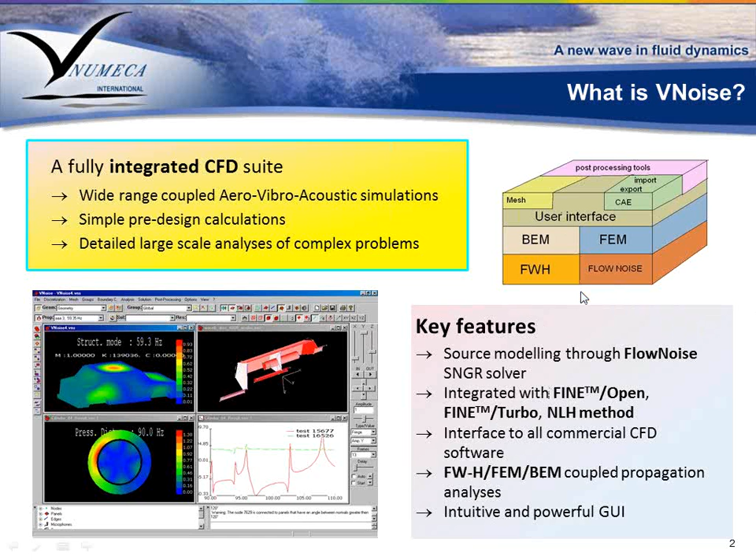So these are the main modules that are present in VNoise, and the focus of this presentation will be to show some practical applications of the software. For this reason, the presentation will be split in two parts. In the first part, you will have some examples on how to apply VNoise to turbomachinery, in particular to simulate tonal noise. Two cases are considered: an air conditioning fan and a rotating propeller. In the second part of the presentation, instead, I will show you how to use VNoise to model broadband noise generated by a ducted valve. I want to underline that this webinar is focused on practical applications.

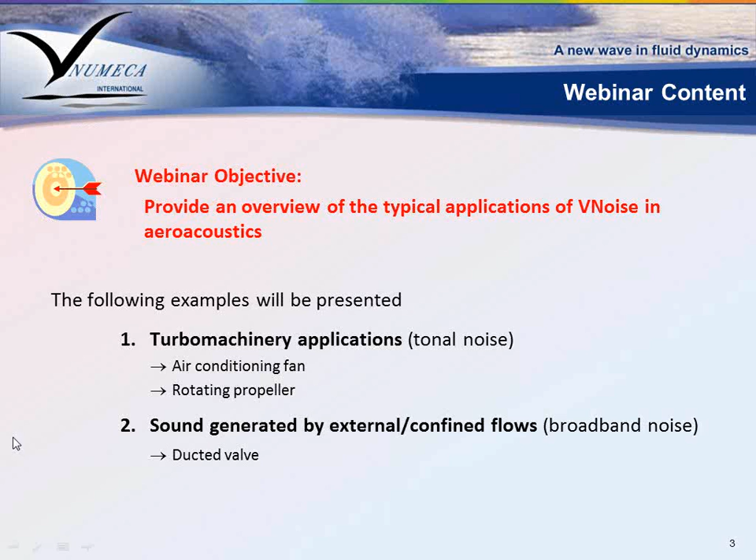For a more detailed description at a theoretical level of the modules implemented in VNoise, I remind you that this information is included in the previous webinar that was held by Numeca some months ago. Okay, so we can start with the first part, turbomachinery applications. As you may know, the main noise generated by turbomachinery is tonal noise generated by unsteady flows, so this is a deterministic noise type.

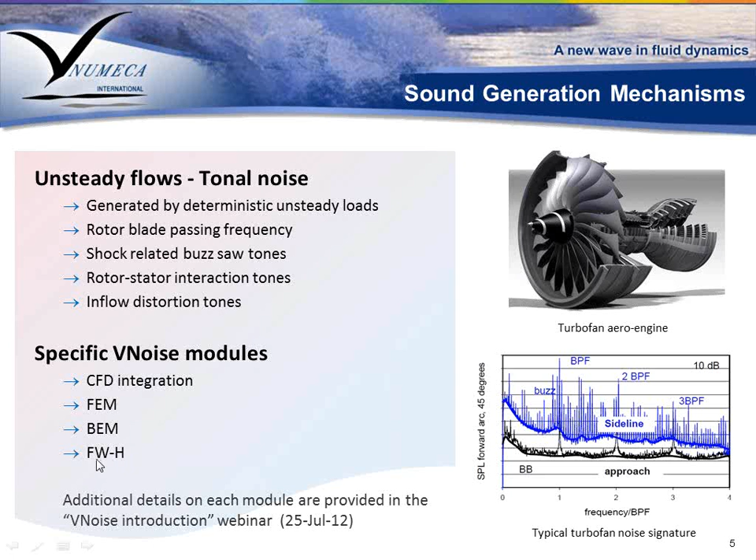So this example of application is focused on the computation of the noise at the BPF and at the harmonics, so tonal noise. For this purpose, in VNoise we can use several modules, so the CFD integration module. We can apply a finite element method or a boundary element method to compute the sound propagation. In the case of the rotating propeller, I will show you also an example on how to apply the Ffowcs Williams-Hawkings method.

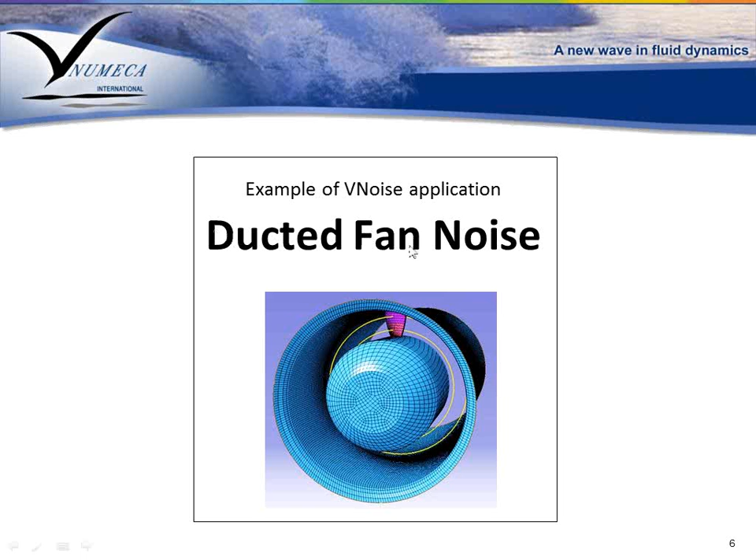Okay, so the first case that I want to share with you and present to you is the simulation of a ducted fan. In this case, we have a fan that is ducted here, and the goal of the simulation is to compute the noise generated by the fan and radiated outside from the intake.

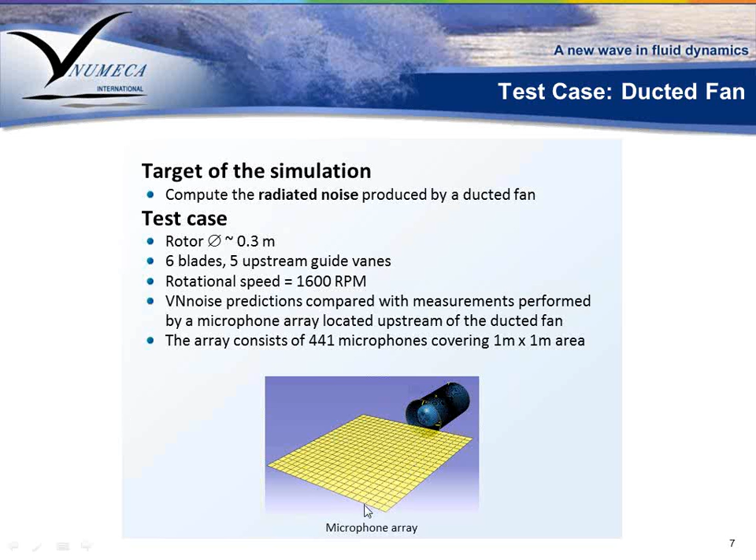So the rotor is very small, 0.3 meters of diameter. We have 6 blades, 5 upstream guide vanes, and the simulation results are sampled over this microphone array that is located in front of the intake in which the fan is enclosed, and the results are then compared to measurements performed by placing microphones here.

So the computational approach will be first to compute the acoustic source, so to characterize the acoustic source. We know that the source in which we are interested is tonal, and for this reason we can perform a CFD simulation to extract the acoustic pressure over the blades, and for this reason we have adopted the NLH method, so the nonlinear harmonic method implemented in FINE/Turbo.

After this, once the source is computed, we then have to work with VNoise to compute the noise propagation. And in this case, the mean flow in the duct is low speed because this is an air conditioning fan, and it is sufficiently uniform to allow the application of a boundary element method. So for this reason, we have to generate a BEM acoustic mesh, and then the mesh has to be generated and imported in VNoise.

Then once we have the acoustic mesh imported in VNoise, we have to import the NLH solution, and the solution will be projected onto the acoustic mesh, and this projection will be used as a boundary condition to model the source in VNoise. Then we perform the sound propagation in the duct and the radiation outside of the duct towards the free field by using a multi-domain boundary element method analysis.

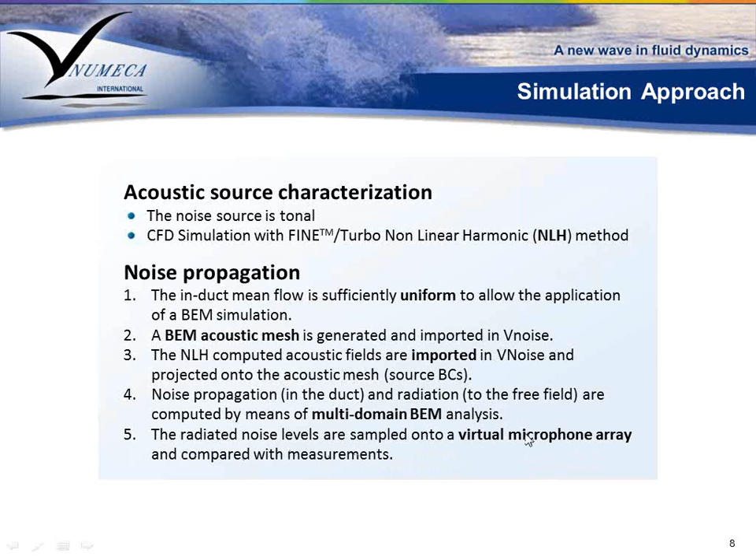And then the last step is to post-process the acoustic results and compare the results with the measurements. So this is the sequence of our computation. We will now go through each of these steps, showing some images and some of the results obtained.

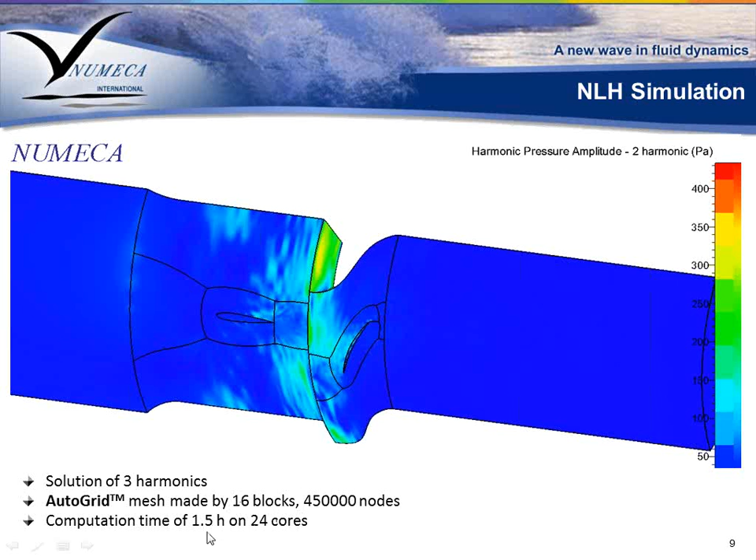The mesh was realized in AutoGrid, and you can see here the size of the mesh used, and the computational time was very fast, considering that in 1 hour and a half on 24 cores we got a solution up to 3 harmonics. So this method is very powerful to compute the tonal acoustic source, that can be then input in VNoise.

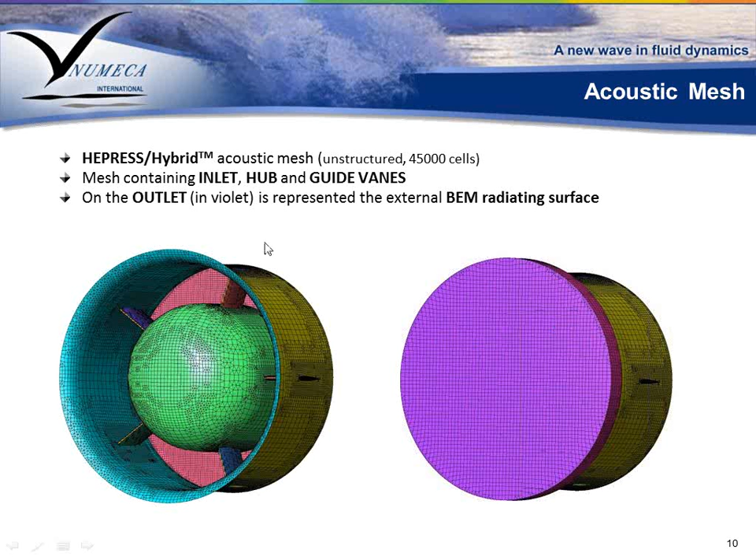So we can then perform the step necessary to import the NLH solution in VNoise. As you can see here, once the acoustic mesh is imported in VNoise, VNoise also imports the NLH solution. That means the NLH mesh plus the NLH solution. The meshes are overlapped, as you can see here, and on this plane, the inlet surface plane, the solution of NLH is projected directly onto the acoustic mesh.

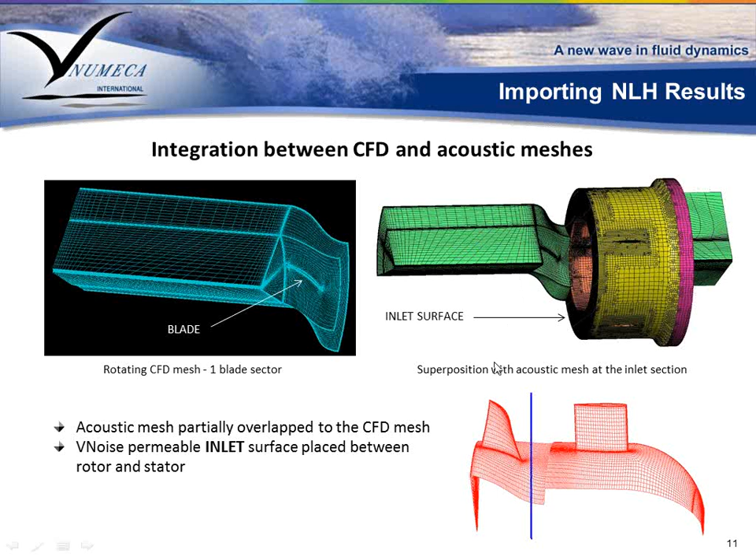In this case, we are using the NLH solution, but this process can be applied to any solution that you may have obtained with your own CFD code. The result of this importing is represented here. So on the inlet surface, you see the solution, the acoustic field. This is a typical acoustic field at a given frequency, imported.

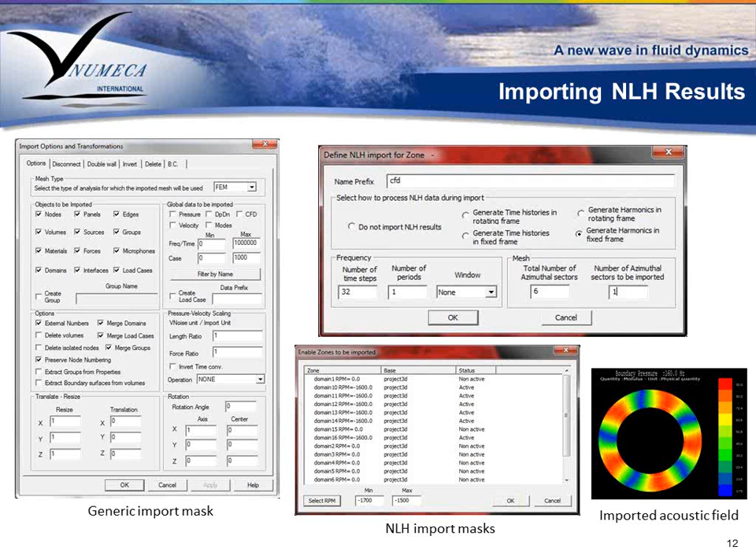For this reason, VNoise offers this import mask, in which it is possible to define whether I want to import the solution on a rotating frame or on a fixed frame, and if I need to generate time histories from frequency data, or the opposite. And it is possible, if I want to model, for example, a fan, like in this case, to import just one blade. So the solution is computed over one blade. VNoise will automatically rotate the solution and create the full 360-degree acoustic solution on all the rotor.

So once we have imported the solution, we have now to set up the VNoise model for the computation of propagation. In this case, as I said before, we are using a BEM model. You can see here a sketch of a section of the duct. We have imported the NLH solution on the inlet, and then on these solid surfaces, instead, we will define a boundary condition that tells the BEM solver that these surfaces are rigid, so the sound is reflected by these surfaces. And then, as I showed before, we have also to create a permeable mesh over the outlet to close the computational domain, and it is represented here.

So we have a radiation surface, this one; practically it is this mesh that will close the duct. And also in between the two meshes, the external mesh and the internal mesh, we need to define a condition that ensures the continuity of field variables. So here we define an interface boundary condition that allows the acoustic waves, as you can see here, to cross this surface.

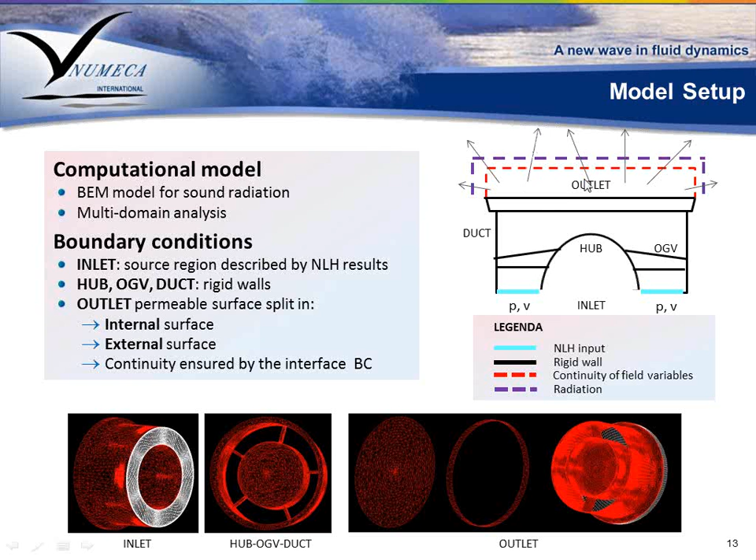Another important aspect to be considered is that when you apply the BEM method, you work with panels, so with a surface mesh, and it is fundamental that the normals of each panel are pointing inside the computational domain. So as you can see here, VNoise allows you to very easily verify and to exchange, if necessary, the direction of the normals. Here are represented the normals of the duct. Here are represented the normals of the cap closing the computational domain.

As said before, we need to have a radiation mesh. The radiation mesh is the green one, and it is a mesh coincident with this red one, so sharing the same nodes but with different panels. And the normals of these panels are pointing clearly outside, towards the computational domain that for this mesh is the external space.

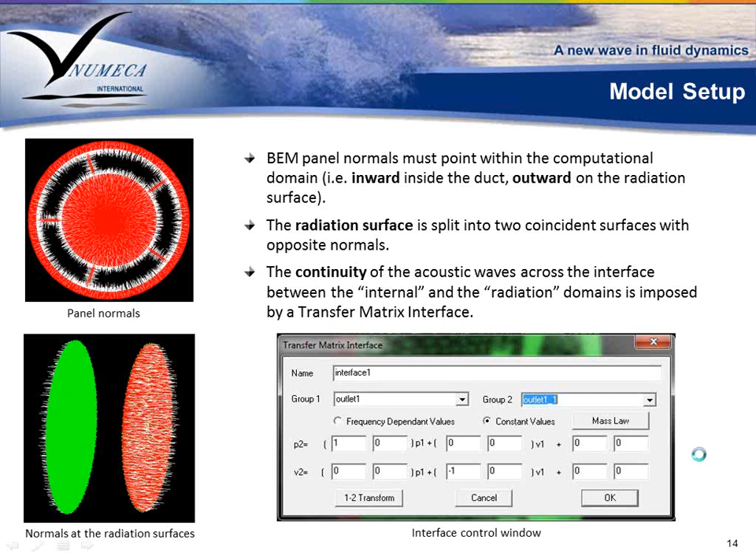In VNoise there are masks like this that allow you to define the interface boundary condition, for example, from a closed computational domain to a radiation computational domain. Here you can link the acoustic pressure and the acoustic velocity on this green mesh to the acoustic pressure and acoustic velocity of the inner part. So by defining, for example, this coefficient, you can allow the propagation of waves across this surface. So this is a powerful mask that allows you to create the model rapidly in VNoise.

Once you have set up your model, you can start your analysis, and you will obtain the radiated acoustic field over the microphones defined in VNoise. The microphones are located here outside, and typically in VNoise you can visualize the results in terms of sound pressure level, so in decibels. This is the map over this microphone of the sound pressure level at 800 Hz. You can see the comparison with the experimental results obtained. And here on the right side you can see an animation that VNoise can provide. So you can visualize the acoustic waves at a given frequency radiating from the intake.

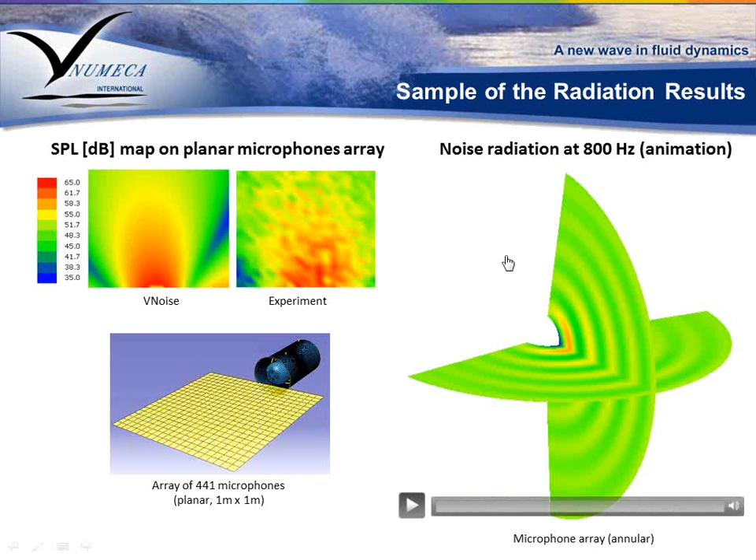It depends where you put your microphones. You can also have values expressed from Pascal to decibels, with a narrow band spectrum up to the 1/3 octave band spectrum. You can obtain also computation of the radiated power or averaged values over a given surface, like the average impedance or the average intensity and so on. So this is a first application showing how to model a fan for ventilating systems.

The second application that I want to present is the simulation of noise generated by a rotor of a propeller. Here we are considering a contra-rotating open rotor, but we will apply the simulation of VNoise just to compute the noise generated and radiated by one of the two rotors, so by this one.

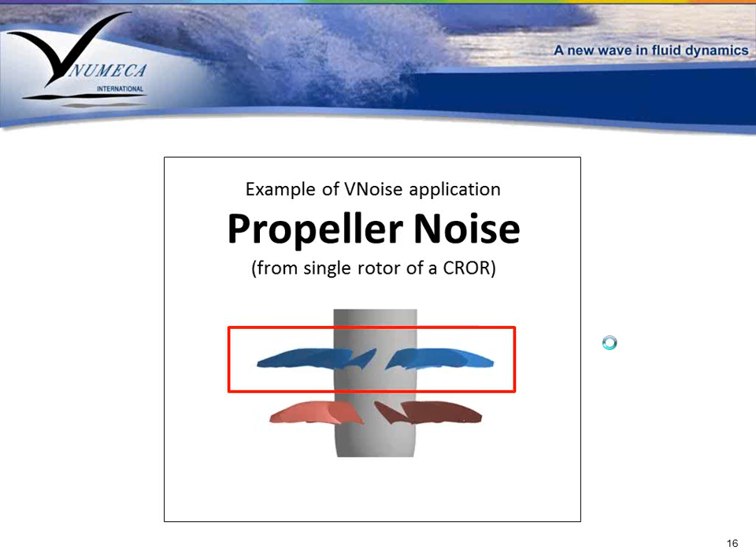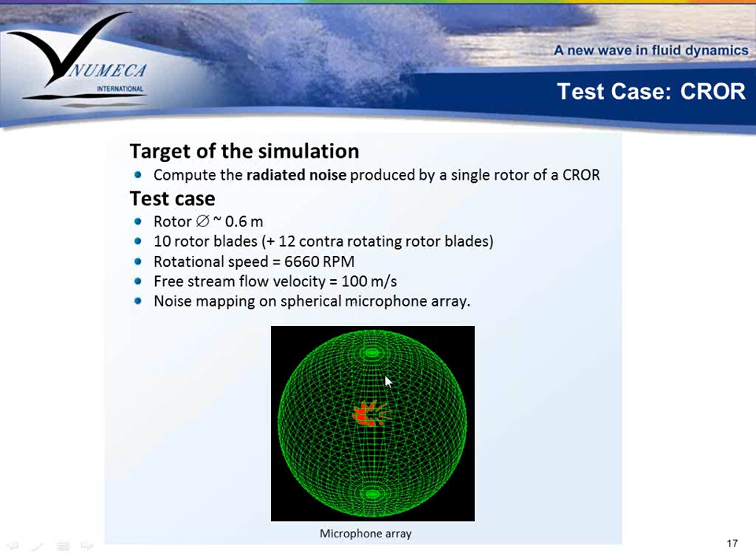The case is this one, shown here. We have a rotor of 0.6 meters of diameter, and that is this one. We have 10 blades on the rotor, and 12 blades on the contra-rotating rotor. This is the rotational speed, and the goal of this simulation is to map the noise radiated over this spherical microphone array.

The approach will be to perform again an NLH simulation, because the main noise that we want to study here is tonal. And as said before, to simplify the demonstration of this application, I have just considered one of the two rotors. So we are studying the noise coming from one of the two rotors.

Then we start from the NLH simulation. In NLH we model just one blade passage, so in VNoise we have to reconstruct the 10 rotor blades, and I will show you how to do that later. After this step, we can import the NLH solution in VNoise directly and project the results directly onto the surface mesh.

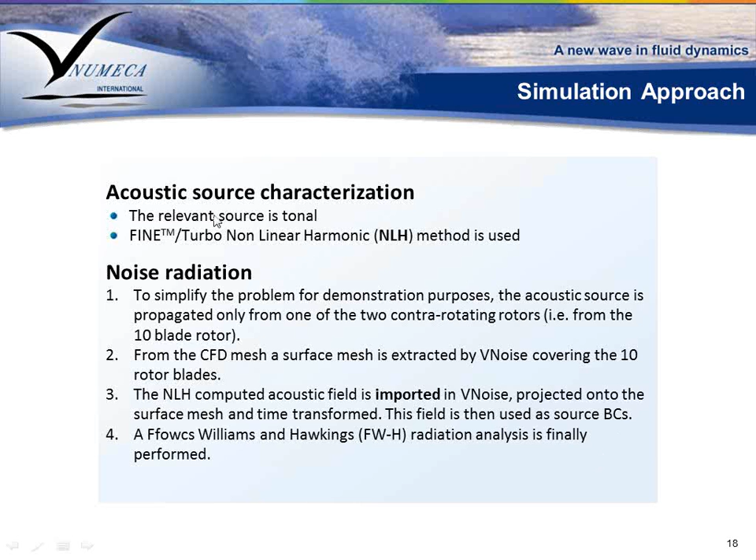NLH, as you know, provides harmonics, so the data obtained are expressed in the frequency domain, but VNoise can transform this data into the time domain to reconstruct the time history. This is necessary because we are then applying the Ffowcs Williams-Hawkings method, which needs a time history as input. So this is the sequence of steps that we are adopting.

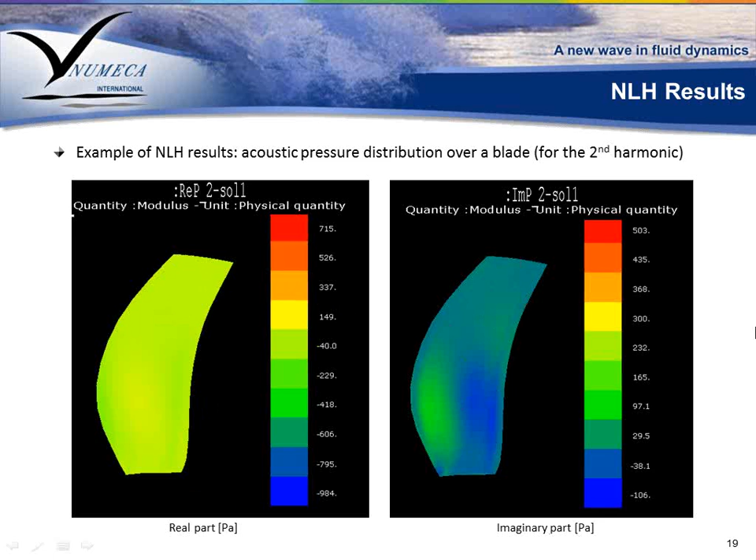Here we can see a sample of the results provided by NLH. On a given blade, at a given harmonic, in this case the second harmonic, we have the acoustic pressure. You can see here the real part and the imaginary part of the distribution. These results are then used by VNoise.

Here you can see that the computational mesh in NLH models just one blade-to-blade passage. For this reason, in VNoise you can import this volume mesh and extract directly the skin of the free surfaces of this mesh, creating a surface mesh made of panels. Then the mesh for each blade can be rotated easily in order to create at the end a 10-blade surface, represented here.

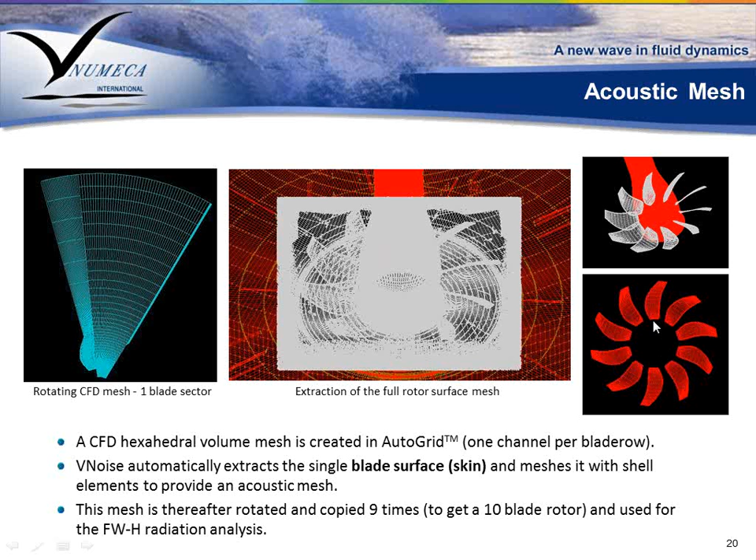So in this pre-processing made by VNoise, you can extract from a CFD mesh your acoustic mesh, which in this case needs to be a surface mesh that can be used for the Ffowcs Williams-Hawkings propagation analysis.

Here again is the import mask that, once you have the acoustic mesh, allows you to take the CFD solution as input and generate time histories. In this case we are generating time histories in a rotating frame, because we want the time history of the fluctuating variables at each node of this mesh, and the frame here is rotating at a given speed.

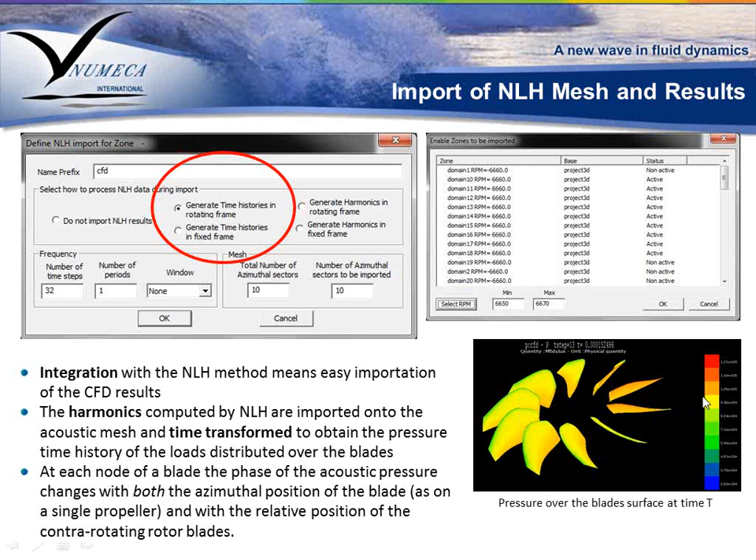So we can import the solution, and you can see here at a given time step an example of the acoustic pressure distributed over the blades. After that, it is possible to launch the Ffowcs Williams-Hawkings radiation analysis. This analysis can be controlled by this mask.

In this mask you can see, for example, the rotational speed indicated here. You can define the velocity and the rotational axis, so you can define all the kinematics of your rotor here. Then you have a mask where you can include the fluid parameters, typically the sound speed and the density. Then you can select the different types of formulations. In this case, we are using the Ffowcs Williams-Hawkings formulation 1A.

Then you also define the maximum frequency for which you want to reconstruct the results, because Ffowcs Williams-Hawkings provides a time history, and this time history is Fourier transformed to get the data you need at the different frequencies. Typically, this analysis is made for a period at least as long as one rotation of the rotor.

Another important parameter is this one, which represents the unsteady load period, the duration of the CFD simulation. This duration can be smaller than the rotational period of the rotor, as in this case. In particular, it is 24 times smaller. This is due to the fact that on a blade of one rotor during a rotation, the acoustic loads change 24 times due to the interference with the second, contra-rotating rotor.

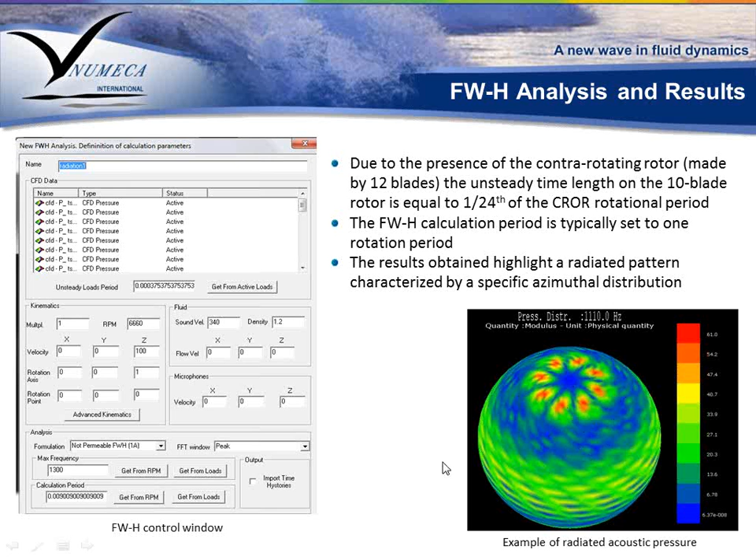And now I will enter the second part of this presentation, in which from the computation of tonal noise we switch to computation of broadband noise. This is typical noise that is generated by turbulence on surfaces, like over wings or wherever you have a solid body embedded in a flow. So the sound here is generated by unsteady velocities due to the turbulence, and typically this happens in a boundary layer or in a turbulent wake.

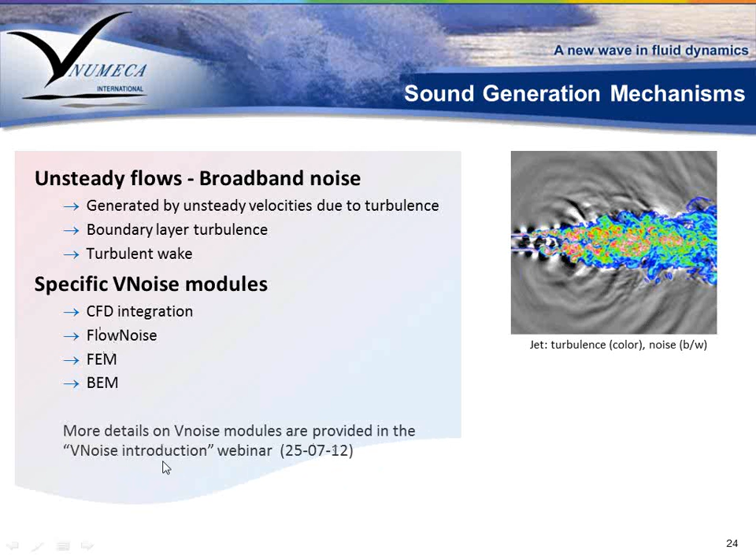What you can see here is that the main modules we are using in VNoise for this analysis are the CFD integration, the FlowNoise modules as well, and for computational propagation, again, finite element or boundary element methods. As said before, all the details on these modules can be found in the VNoise introduction webinar made in July.

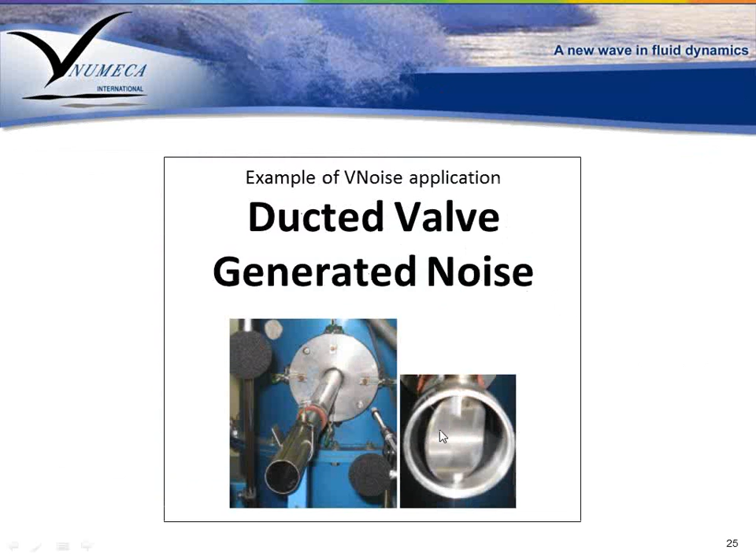So this case is a ducted valve that you can see here. There is a duct with a valve enclosed in the duct. The valve is open at 45 degrees. So there is a generation of turbulence here and the noise. Then the sound is propagated along the duct, and it's radiated outside. When the sound goes outside, it is measured by these microphones. So the goal of the simulation is to compare the results calculated at these microphones with the measurements made.

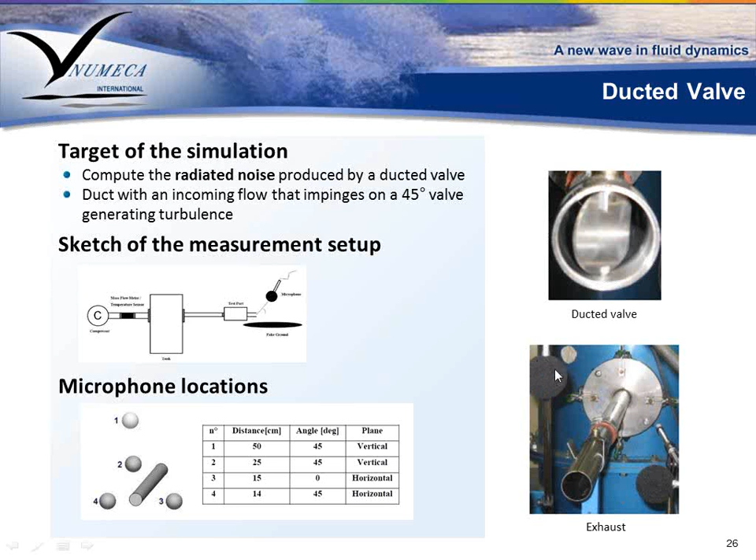The steps of the simulation are, first of all, as the sound here is typically broadband, to perform a RANS simulation that provides time averaged information on the flow field. Then the RANS solution is imported in VNoise, and on top of this solution the stochastic noise generation and radiation model embedded in VNoise is applied. That is a powerful algorithm that allows you to reconstruct the turbulence from steady-state results. This avoids performing complex and time-expensive LES simulations, and provides a stochastic approach to the reconstruction of the noise from turbulence.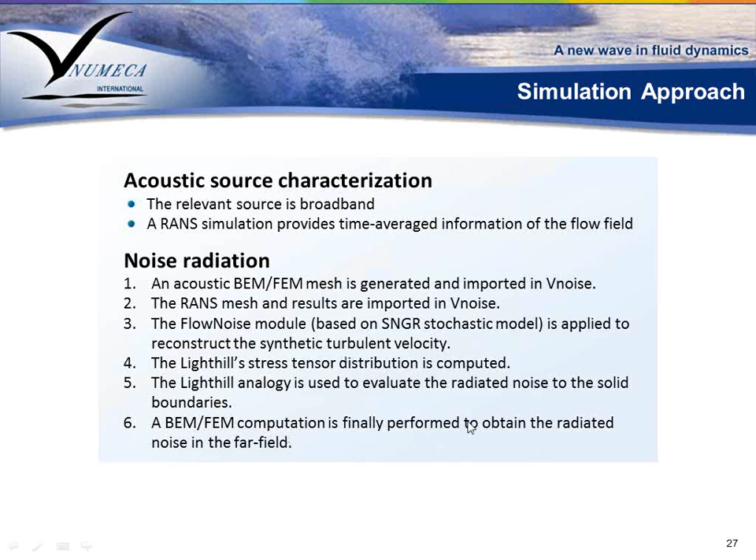After that, once you have the turbulent velocities reconstructed in each CFD cell, VNoise calculates the Lighthill stress tensor distribution on each cell, and then through the Lighthill analogy, the sound is propagated in the free field, in particular over the surfaces that are represented in this case by the duct and by the valve. It is possible then to obtain the incident acoustic field on these surfaces. After that, a BEM or FEM computation is performed to compute the reflected acoustic field. The sum of the incident and the reflected acoustic field provides the full acoustic field. So now we will see all these steps one by one.

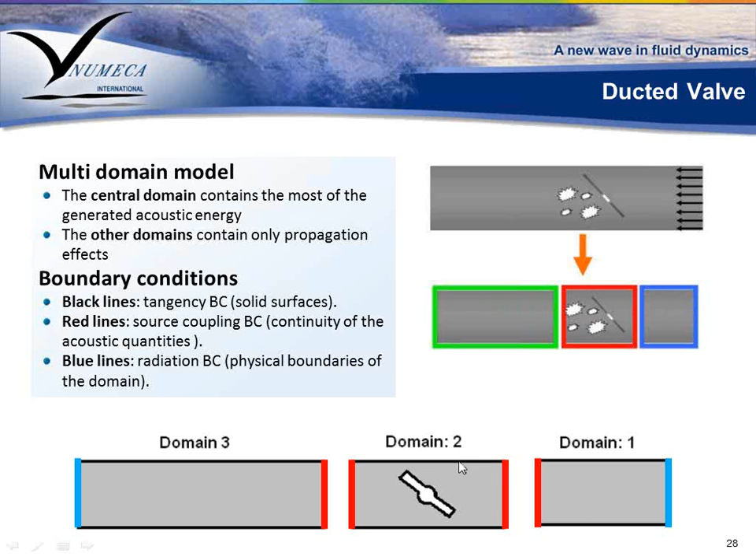So first of all, this is our duct with the valve. The flow is coming from the right to the left side. There is turbulence generated around the valve, so we can first of all subdivide the computational domain in 3 closed domains. 2 are used for the propagation, domain 1 and 3, and domain 2 instead is used for the computation of the source.

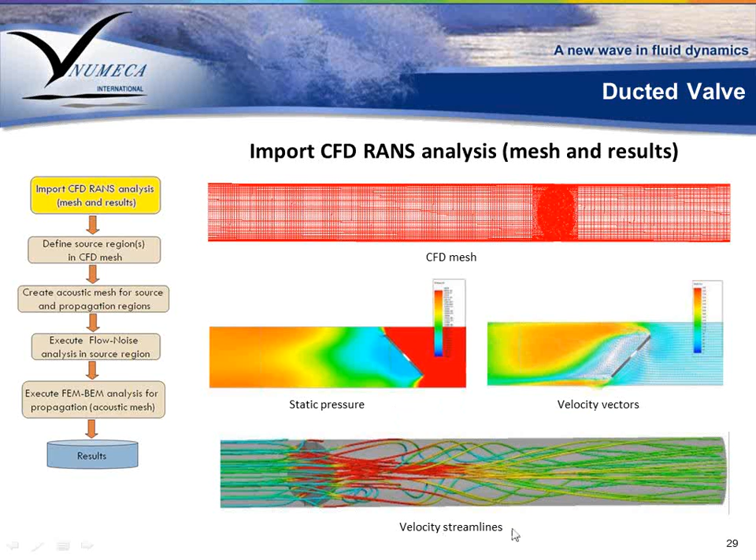So the first step is to perform a CFD analysis. You have here a CFD mesh, and the RANS analysis provides static pressure values, velocity vectors, velocity streamlines, but in particular turbulent kinetic energy and the dissipation. These parameters are used then to identify the acoustic sources, where they are located and what is their intensity. So based on the turbulent kinetic energy and on the dissipation level, the sound sources are reconstructed.

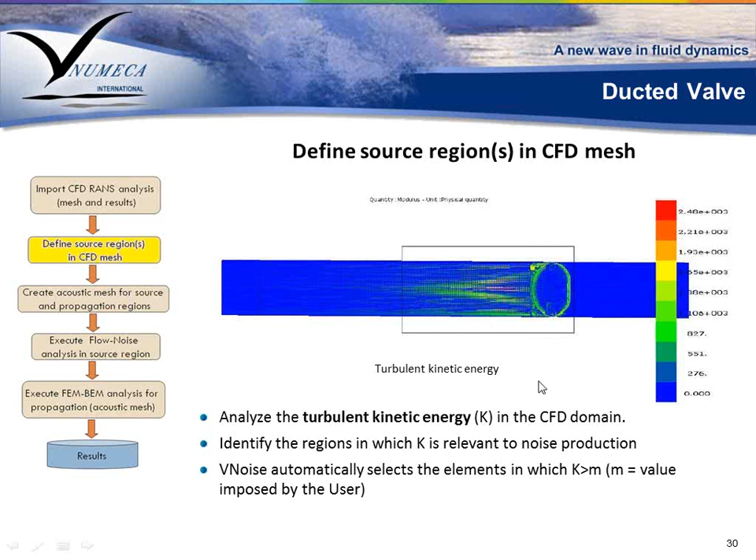VNoise allows you to automatically extract the source, so from all the CFD domain to isolate a subdomain containing the relevant turbulent kinetic energy. So the user has just to define the minimum value of the turbulence, and VNoise will extract all the solid elements containing a turbulent kinetic energy higher than that value.

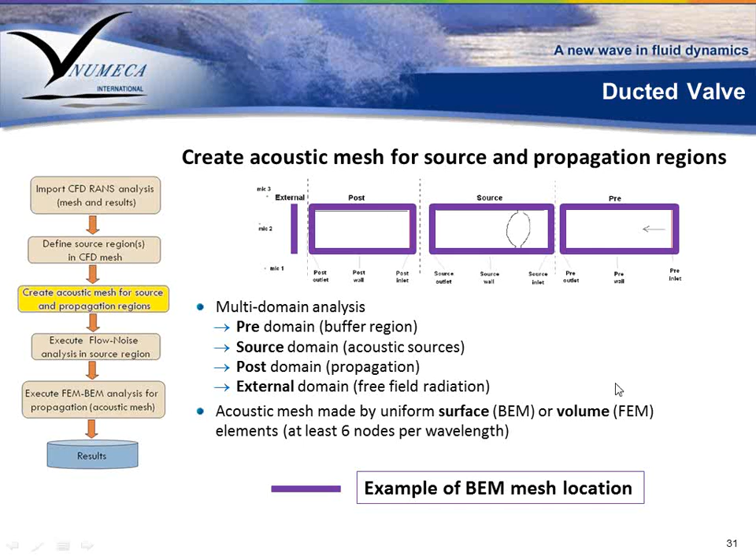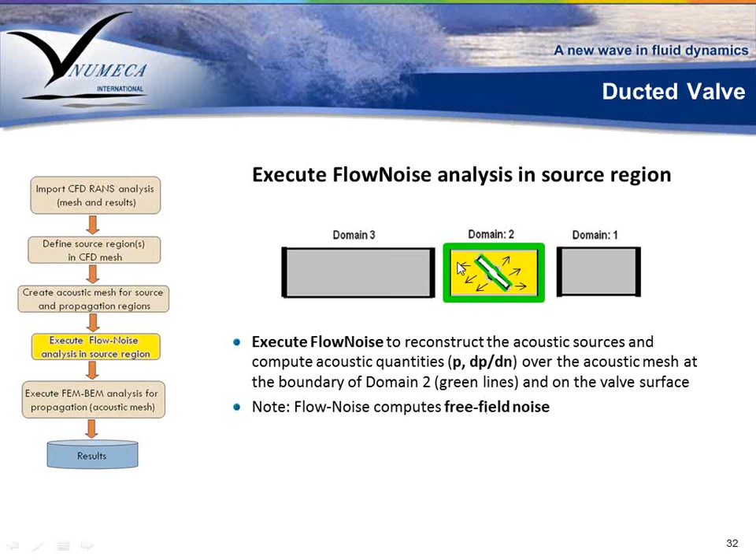Then once we have the acoustic source reconstructed in the internal domain, in domain number 2, VNoise will provide the incident acoustic field on the boundary of the duct here and on the valve. So all the acoustic sources obtained from the CFD analysis and by VNoise in this computational domain are radiated to get the incident acoustic field on the green surfaces and as well on the valve. So once you have the incident acoustic field here, you can then in the next step use this incident field as a boundary condition to start a propagation analysis.

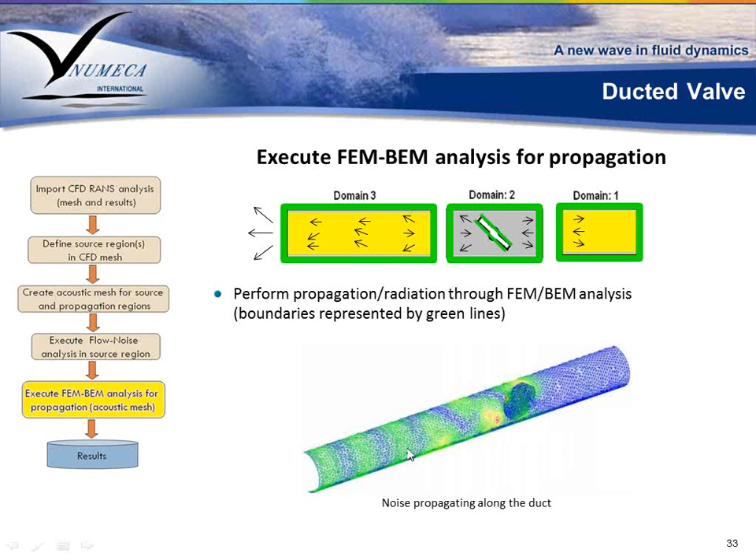So you will add also the other 2 computational domains, and the boundary element analysis will be performed coupling together all these domains. So the sound will be generated from the valve, radiated on the right-hand side and on the left-hand side here. And once the waves arrive at the end of the duct, they can be radiated in the far field. This is an example of the results obtained. You see the valve here, and you see that there is some turbulence generating the sound waves, and here the sound waves decay, leaving just a plane wave that you can see very well here, propagating in the duct and then radiating outside of the duct.

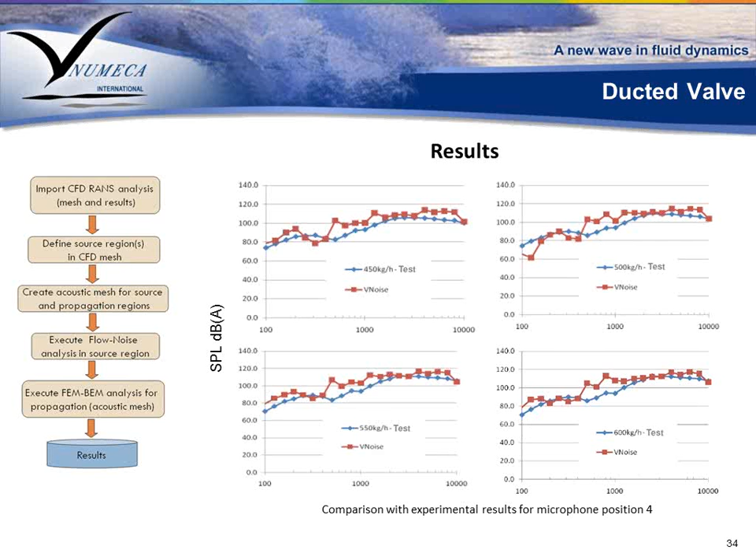So with this, I have completed the presentation of some of the potentiality of VNoise when applied to model tonal and broadband noise, and I will give you now some minutes to maybe formulate questions if you have.